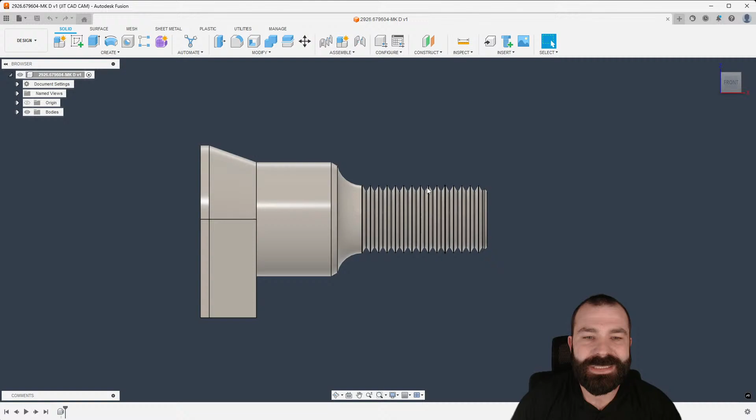So as you guys can see here, this is going to be a mill turn part. So we're going to go ahead and jump over to manufacture. And with that being said, the first thing I need to do is create my setup. Now, I don't know how many times I'm going to have to say this, but I say it a ton and I say it quite often.

Everything you do in Fusion was aimed at kind of like reading a book, right? Now, we're always going to read from the top of the page down, and as I've started to say, every time you see a little line divvying something up, it's almost as if you're reading paragraphs, right? So again, we move top down, left to right. So the first thing I'm going to do is I'm going to create my setup here. Now, again, I asked this question last week, and I'm curious, does it always take a moment for the first time you create a setup to turn on?

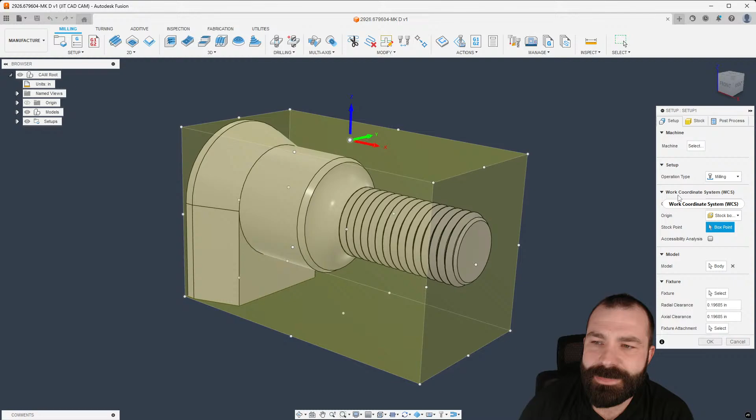But as you can see, everything has come in. We now need to just walk down the page. Again, we're going to read our paragraphs. In this case, this is going on a mill turn, and I don't have a machine definition set up, but we're going to go ahead and swap out to turning. And then from there, you're going to notice it's automatically recognized that this part is round.

Now, me personally, I might start with the Z the other way. I should add into the fact that this customer in particular actually has no sub spindle. So we're not going to do a part transfer here, but they do have a Y-axis and live tooling. So again, we're going to go ahead and move down that paragraph. I've flipped my Z-axis. X in this case doesn't really matter if it's pointing to the right or pointing to the left here. I like to orientate my stuff as in my lathe tooling is going to come back in on X.

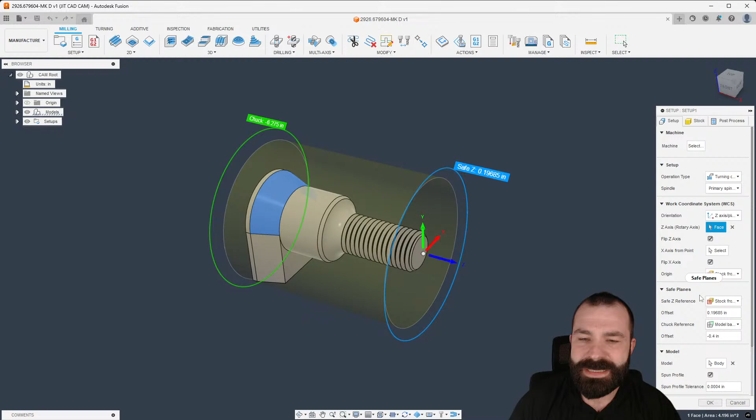But I like to orientate and look at my part with my X pointed away. Again, most tooling is going to come in on that X axis. Now, as we go down to that next paragraph, our safe planes, a lot of times you're not going to change this unless you absolutely need to. Again, we're going to use a reference of a chuck holding the part in the back, a safe plane, which is where all of our rapids go to right off the rip.

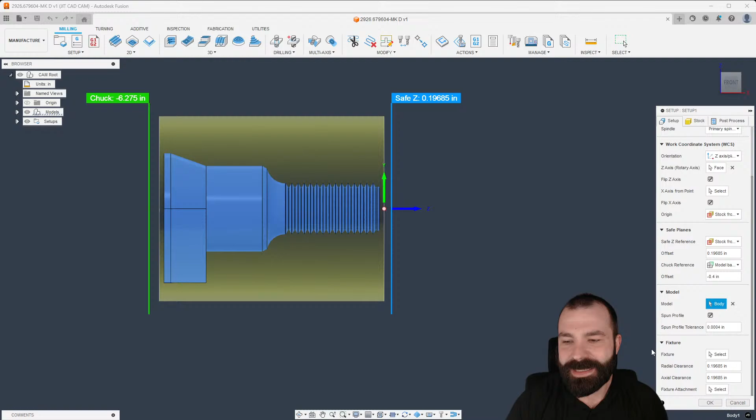So again, we just continue down. Next paragraph, we're going to talk about what you want to manufacture, already selected. Lastly, if we had our fixture or our chuck in here, we could add that in. So let's go ahead and get that page turned. So as you guys can see, Fusion has automatically created my stock. Now, for those of you out there, I can't stress this enough, don't ever use relative, only use fixed size or your solid / preceding.

As you can see nominally, whether or not you believe in the bald eagle increment or that other unit, we're not going to talk about that. You can see it's always a round number, right? You're going to order your stock in a nominal dimension in most cases, and we can go ahead and type that in. Now, I am going to give it just a little extra. Why not? Let's go 6 1/4. And I'm going to show you guys what happens when you intentionally screw something up. But we're going to offset from the front, and then I'm going to go ahead and give it 20 on the front to clean up.

Lastly, for anybody out there, our post-process menu, program name, program number, WCS orient. This is going to be, your 1 is for 54, 2 is 55. If your machine uses something other than that, obviously know that it's just going up in an increment of 1. So we've created our setup. From there, we're going to go ahead and turn the page, right? Fusion, again, is pretty much organized in most toolpaths to run through this stuff right off the rip. If I wanted to face off this part, in this case, I'm not going to because there's no reason to face this tiny little amount.

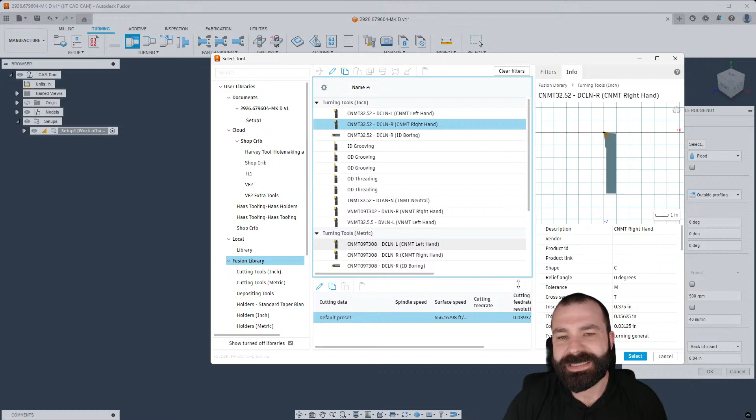So I'm going to jump down straight into roughing. The biggest mistake we always see at JITCADCAM is the fact that people want to go in and change a toolpath, as you guys just saw me do here. By the way, if you guys want t-shirts made up about this, I should make t-shirts. But we can hit OK, and most times the toolpath is actually going to do usually what you want it to do by default, right?

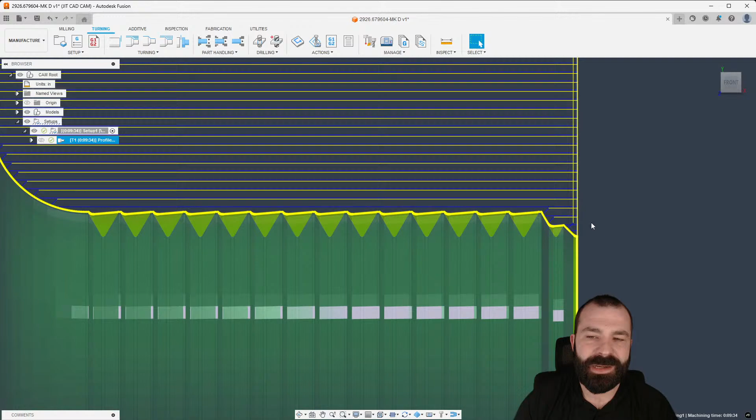So as you all can see, we went ahead and created our toolpath on our part. Now, once we create our toolpath, we can manipulate and change things because visually it's much easier to understand things like, hey, we're undercutting inside of here. I don't want to undercut. I don't want to gouge my part there. I would like to keep that profile as smooth as possible.

And again, we could jump out of this menu, edit what we were doing, and because we're changing the blue lines, as you guys may or may not know, we could go ahead and turn off that grooving. And just like that, we're now coming across that profile and continuing all the way down and around. So because of the way Fusion works, and in Steve's case, FeatureCAM does very similar things, this blue boundary right now is the spun profile. The yellow is the stock still left to machine.

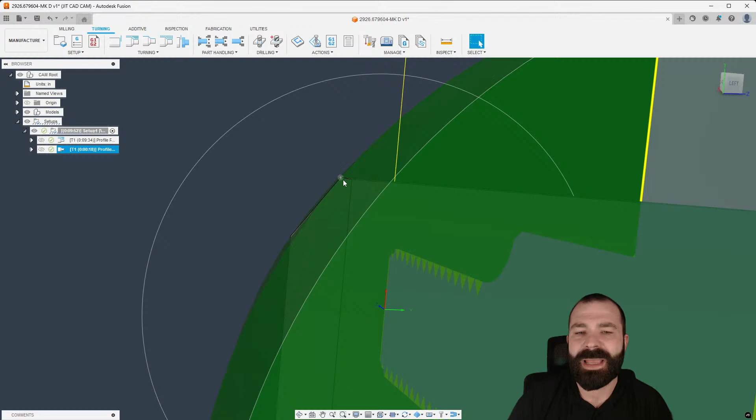So as you can see, we could quickly just derive another toolpath off. In this case, we're going to hit this now with a finishing profile. And again, we're just up and around our part following that same contour. Now, some of you may be curious, why are we not machining all the way up here at the flat? The reason is because that is still not considered inside of our stock. It's right at our stock.

If we were to change our stock size, again, we go in here. Let's say we're actually getting some 5 1/4 round material. And now we're going to go ahead and regenerate our toolpaths. And from that, we should now see, one, me in the wrong orientation. And with that, we're now going up and around and over the top of our part with both of those profile turning situations.

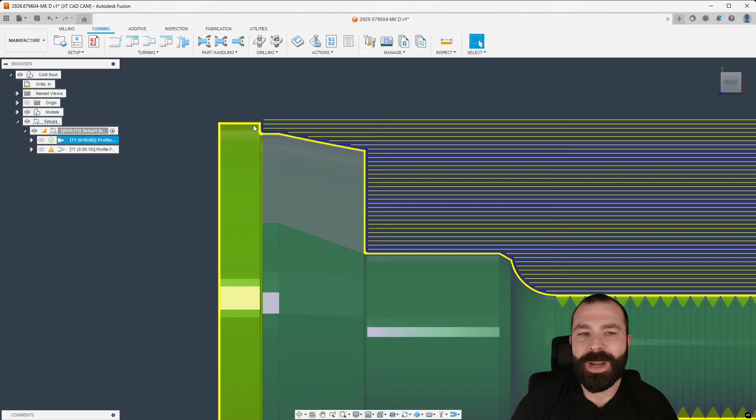Now, some of you are also probably wondering, hey there, Fusion Phil, we never touched the front of this part. Well, this is the fun of having control once you get a toolpath on your part. I can visually see the blue line stop at the front of my model. So if I go to my geometry, the front of my model is basically where we start from. I know I said stop, I should have said started from model front. But if we do something simple like, say, stock front, you're going to notice it's now bumped out that yellow line, which signifies our profile. And now we are basically facing and OD turning all in one shot.

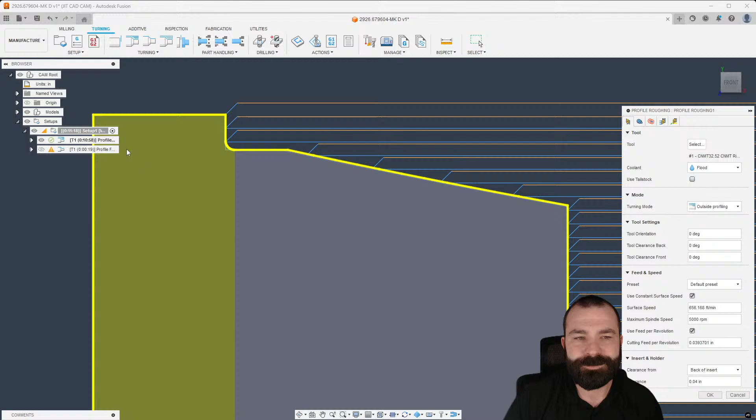We did get an error here, for anybody that has seen me do a demo of our software in any way. Our lead out is being changed because if it wasn't, it would be gouging our part or slamming into this back wall. This is a yellow line, which means linking and is a rapid. We didn't want that to happen. We may need to extend again in our Z axis with how far back we're turning our part. So again, as you can see, Fusion is very quick to update based on those changes.

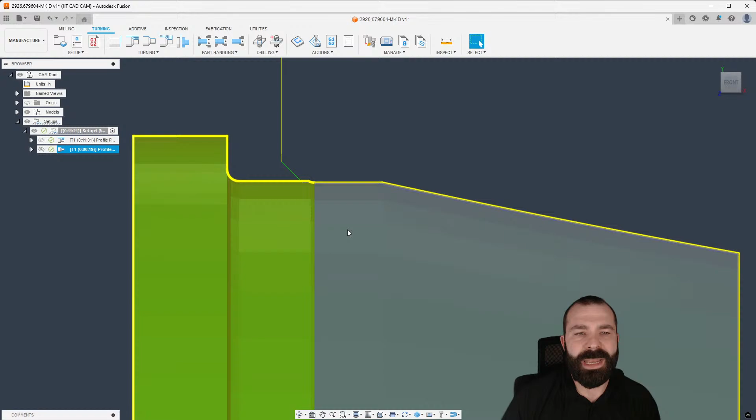Now, we may want a lead out as well here. So again, we go to the lead out linking tab, and I'm going to say allow lead to cut stock. And now you can see we could do a little dog leg move out and get away from our part.

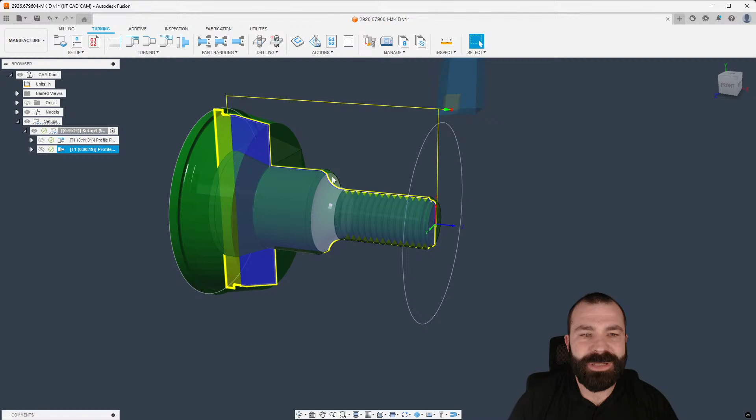But as you guys can see, let's go ahead and change up real quick. Let's add some milling in. And we're going to go ahead and switch back to the milling tab. Now, there's a lot of ways to mill out these features. As you can see, we have some 3D areas here that may need to be taken care of. So what I'm going to do is I'm going to go straight for adaptive clearing.

And in this case, he is a lucky individual because he does have a more sturdy, heavy-duty built machine. It is a DN Solutions machine. So we might be able to get away with a 1/2-inch end mill on a live tool lathe. Now, this is what I'm liking at the end of the day with Fusion, is because I have that ability to see a tool versus my part.

As you can see, this is a massive part, and it's 4140 as I'm being told. And this tool may not suffice for that. So again, depending on what you're doing or how you're trying to do this, this may or may not be the best solution for the system, but it still goes back to that same thing. As you can see, by nothing more than hitting OK on this toolpath, I am still coming in on the Z axis and wrapping around and roughing out that profile.

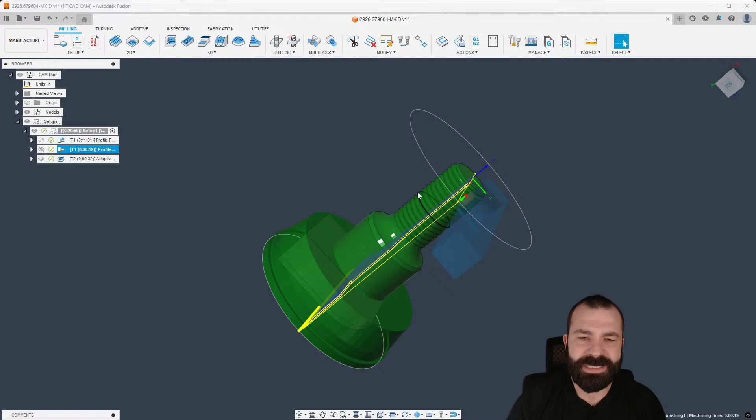So again, this is the great thing about how Fusion works. You guys are seeing here in real time when I turn my profile, we're already getting everything inside of here, and our rest machining for our milling strategy is automatically detecting where it should and should not go for cleaning that area up.

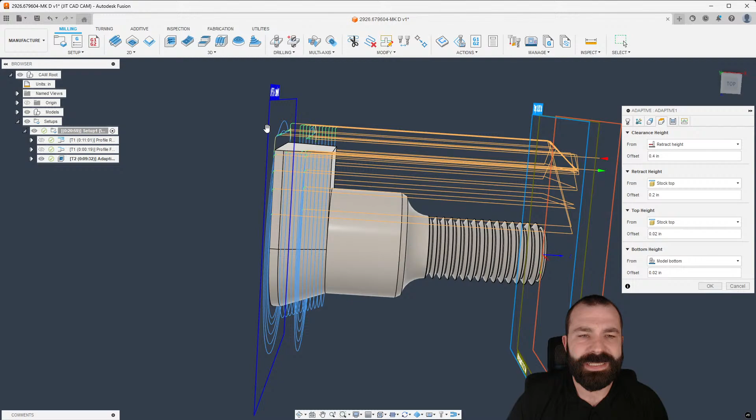So again, if we want to go ahead and pivot from there and start to do something that is going to involve 3Ding the surface, or maybe I want to change the heights tab of this toolpath, as you're going to see, I'm going to drag that down a little bit. Now, you could type in an offset as well, just for those of you that are newer to Fusion. But the idea is still the same, right? Get the blue lines on your part and then make those changes. And the reason why I'm relieving that a little further is so that we have room for a ball end mill to possibly blend this surface.

So again, we could go back to our 3D contour in this case. And we're going to go ahead and pick a tool. Now, you could stay with the flat end mill. As you get more advanced in Fusion, you'll realize a lot of times I do swap my tool out on the fly. And for the sake of Steve, because Steve is brand new to Fusion, as you can see, you could have multiple different speeds and feeds tied to a tool.

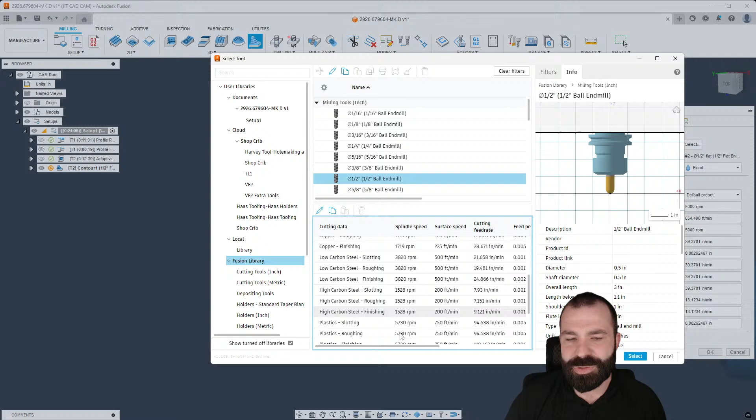And just like the kind of feel of FeatureCAM, you could easily go down and pick whatever it is that you're doing. And then your step over and step down can automatically pull from that tool. Now, I've seen some things coming up that are going to change a little bit of how that material library works, and it will start to feel a lot more like FeatureCAM. So again, we picked the tool. As we always know, let's go ahead and hit OK and see what we're getting.

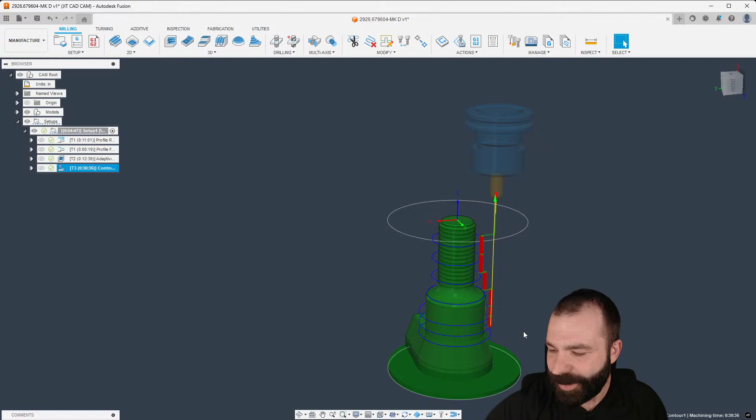Now, as you guys can see, we're only going so far down this part. And this is where I like to test you veterans out there. Does anybody know why we are only going down so far on our part? We're not going all the way down to where that chamfer is. And I will give you guys a few moments to answer. Now, if you can't guess it in the next couple of minutes, that's understandable. I'll show you why and how this is working.

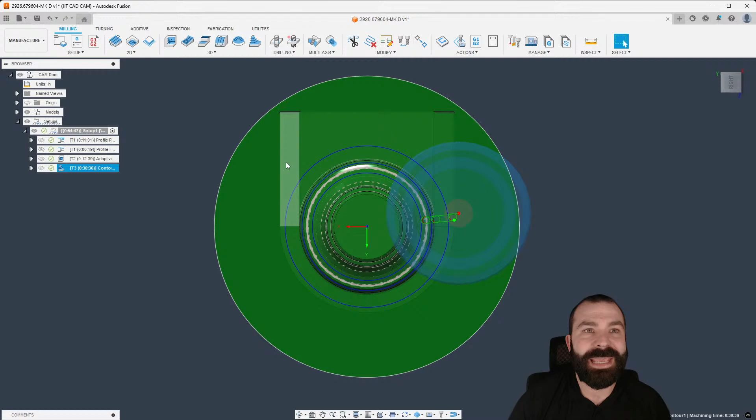As I tell people, you get the blue lines and then you determine what's wrong with the blue lines. Well, in this case, we'll go ahead and visit that here in a second, Elijah.

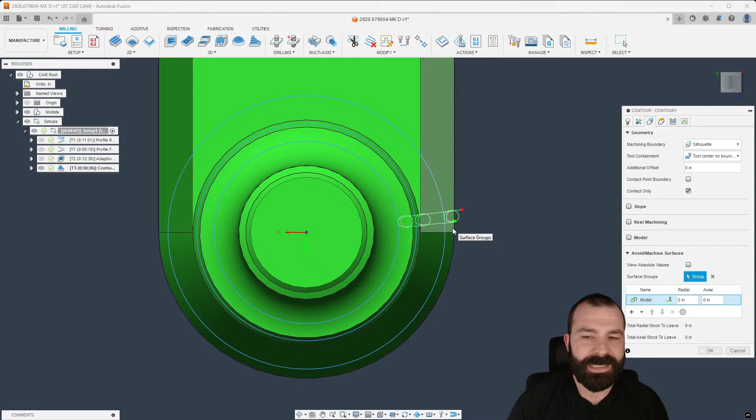What I'm going to do is edit that toolpath. Because we're looking in an XY plane, the reason we can't get outside of there is because we're basing the containment on tool center and a silhouette of the part. As you can see, this blue line is almost to the point where it is the center line of my tool, but it will not go outside of the profile of this part. So there are ways to remedy this. We could say tool outside of boundary, or we could even turn on contact point boundary, which should help remedy this situation.

As you can see now, we are going deep enough in Z and 3D'ing everything out as well. We can simply go in and change our step downs. I'm going to pivot here once we get the step down changed, and I'm going to limit where we're going by using rest machining again, so that we can limit where the toolpath actually hits our part. Again, it's all now down at the bottom area. From that, we can switch gears into turning those threads.

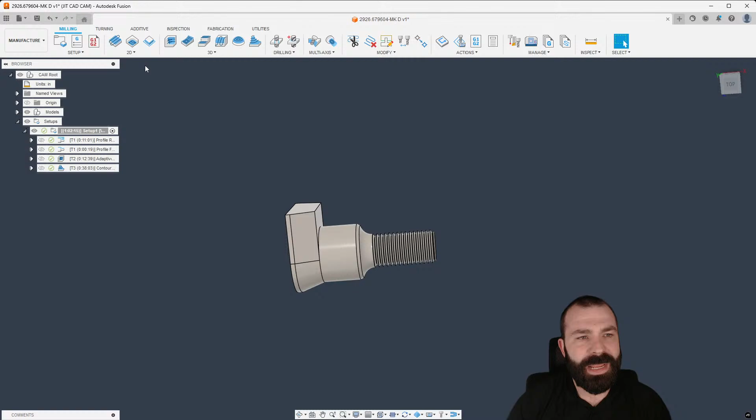So in this case, I'm going to go ahead and go to turning. We're going to go down and pick thread. And from thread, there's Steve.

Steve's throwing 10 in the chat already, guys. There he is, he did it. That's the beer, right? Here you go, Steve. This one's for Steve, boys.

Yes, I know it's NA. I'm not going to drink a real beer on here because I'd get sloppy quick, I think.

But as you can see, we went ahead to go threading. I'm going to pick my threading tool. Again, you guys are going to define this stuff over time. Where's my OD threading?

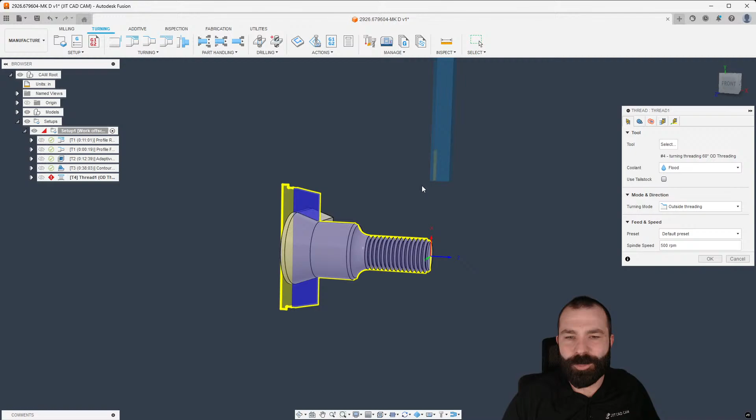And from that, what you're going to see is based on our geometry, we need to define a face. So if I take my own rules to heart, had I hit OK, I would get this lovely error message, which would pivot me over to the thread face that I need to select.

Now, the bad news here is that the top of every one of these is a face to thread. Usually we don't like modeled threads inside the software. However, thinking about how we can filter this out, I can jump over and change where we start from on the front and even how far we go back. So I'm going to do selection here. As you can see, by selecting that second edge, we're now threading the length of the part.

And with that, we're going to pivot over to the passes tab. Now, this is where I think a lot of people get confused inside of the software. I myself feel like no matter what I do for the dimension here, I always have the same problem.

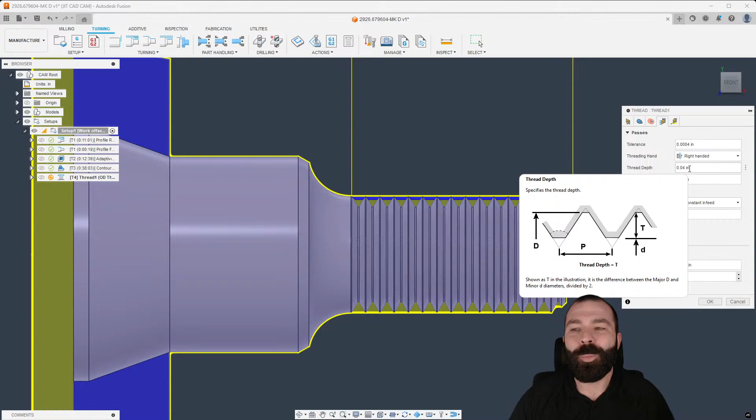But in the world of turning, thread depth is radial. And in the world of thread milling, thread depth or diameter offset is diameter based. So we need the difference between the major diameter and the minor diameter, which, as Steve said, is 1375 and 115. So we need to take those two numbers. I'm making an educated guess here, that looks like 260 divided by 2 would be 130, right?

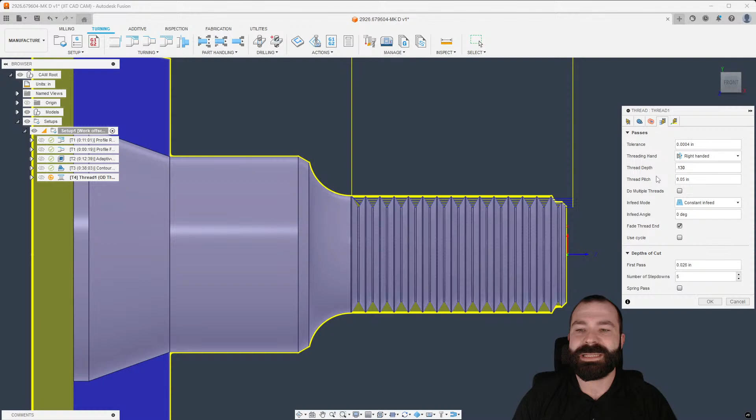So my thread depth is 0.130. And again, remember, we're basing this off half of whatever that difference is between the two diameters. Or if you're looking at the Machinery's Handbook, you'll get the radii by default in your thread height. But as you can see, the blue line actually lines up pretty good to the bottom surface. And from that, we have our threading cycle.

Now, we do need to still adjust our pitch. Where was it? 6 threads per inch. So we could do the good old-fashioned 1 divided by 6, being able to type in these menus to give us our feed. And from there, number of step downs, of course. As you can imagine, you probably want to make this in a couple of step downs. This is a pretty good size part.

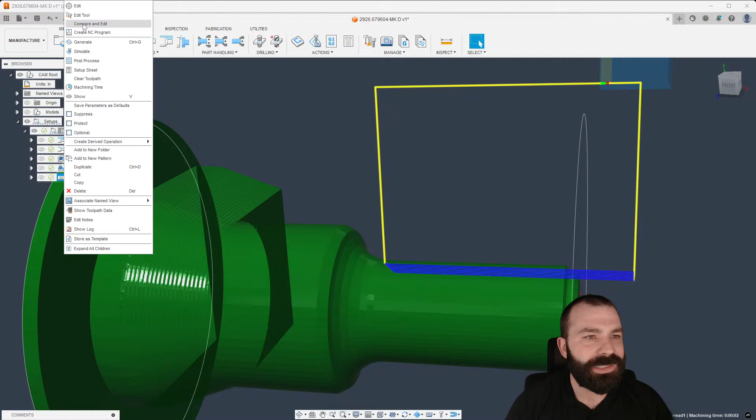But as you are looking, if I get my model out of the way, and we're going to turn off the good old-fashioned spun profile, in this case, we're actually slamming that tool in the part. I thought it would physically give us, oh, it should give us the threads, but that is a tiny tool. So we're going to go ahead and update a few things here real quick.

Thickness, no we don't need thickness. We need overall width there. And then we need to change our thread pitch, of course, so again 1 divided by 6 in this case. That should make the thread much larger, but of course it's not wide enough.

And there we go, we have a much larger turning tool in place, and we can regenerate our cycle. So with that, as you guys notice, we don't have it simulated here. Let's go ahead and run the simulation on this to see what's going to happen.

So now this will be the biggest difference for Steve at the end of the day, is that the simulation inside of Fusion does not have currently mill turn machine sim. But as you can see, walking through all of this stuff, we can continue.

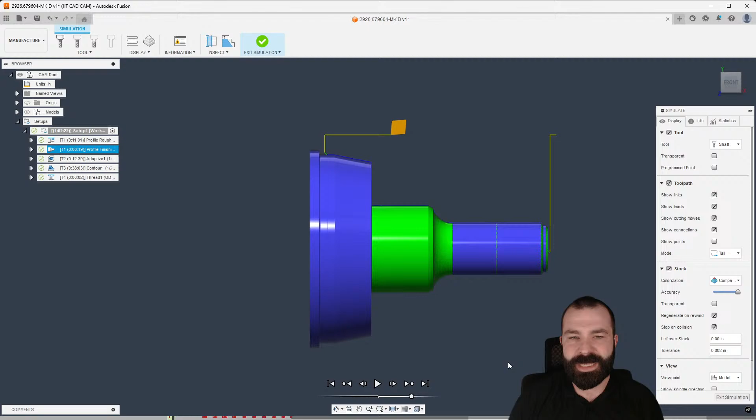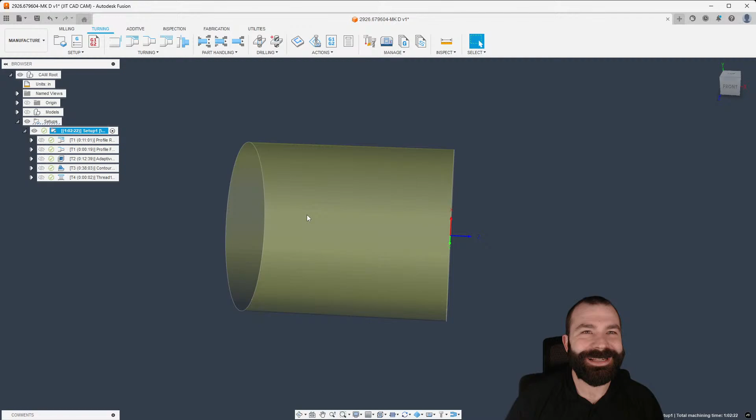Let's just go ahead and say overall length is 6 inches, and we are going to use 5.5 inches worth of stick out, right? Why not at this point? That should get that job done, and then we're going to edit this tool as well.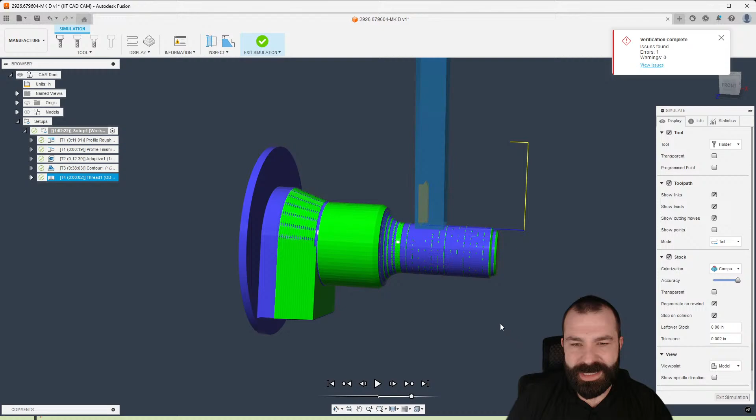So again, we have everything set up here. Let's go ahead, I'm going to simulate just the threads. And it looks like we should get a solid model that shows threads.

3 a.m. in Australia, bit of a struggle. Matt, what's going on, buddy?

So again, let's go ahead and change a few things here. I want to get that model turned off. And we can let this run through.

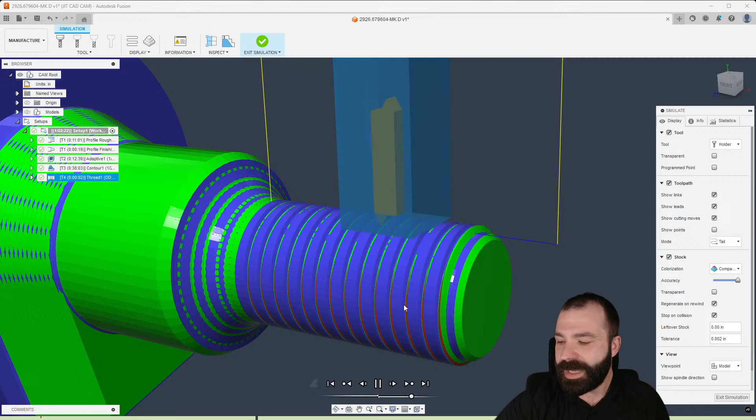And again, we're going to get some red here. For those of you that don't know, that red coloring is normally you hitting the part. But because of the way these threads were modeled, they were just as rings, as if this is either something for plastic injection molding, or you have that silicone tube that's going to slip on there.

So I'm going to give this a second. I do have my accuracy turned way up. As you guys can see, it's slowly coming through. Maybe I'll turn my accuracy down, or we will crash Fusion.

There we go, went ahead and paused it. Again, as you guys can see, we have our threading cycle coming through that part. And with that, the last thing to do, I'll leave it to you guys while I go back and read up on Elijah's information here.

Need to thread mill a 632 in stainless this week. That's going to be a good one. So I bought every thread mill, but this one would be the first time using them. What's the recipe? Here's the link. Awesome.

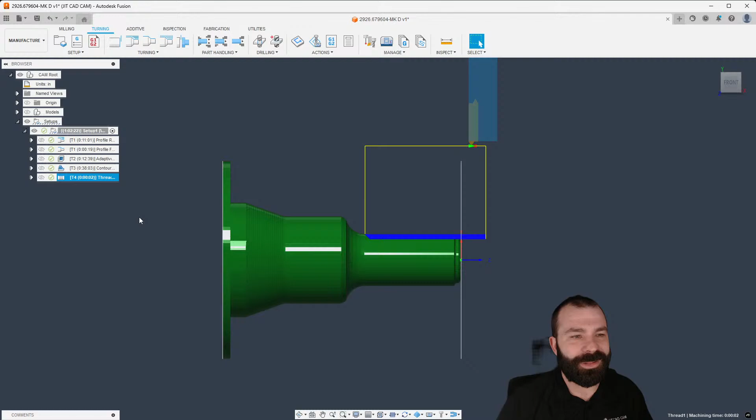Elijah, we're going to look at thread milling. We might as well, we're doing turning here on the lathe. And the last thing we want to do, I don't see anything in chat, but we're going to go ahead and turning part, this is where we're going to part off our model.

Again, we go to our library, pick your OD grooving or OD threading tool. And we need to turn that model back on, of course, so we can see what we're doing. And now this is where I would tell you guys the importance of your stock and the size of your stock.

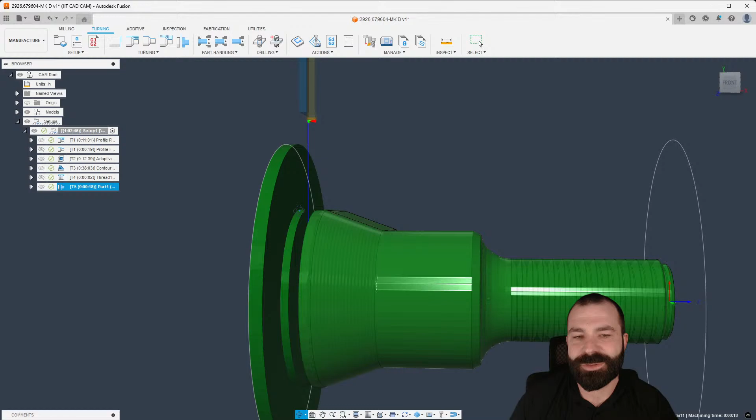So visually right now, you guys can see, in this case, I'm not going to hit that stock, but if I was to have to do something like flip this part over, Fusion is still going to recognize this stock right here as being in the way or a problem.

My dog is trying to come into my office right now, and she just barged her way in. There we go. But other than that, Steve, I hope this helps you out.

Let's go ahead and pivot real quick to a little bit of thread milling with Elijah and get another file opened up. I'm trying to think what I have for thread milling. Actually, you know, we could thread mill this on the Z, could we not? Let's go ahead and go for it. Be a quick second, make sure nobody's got anything in the support channel here.

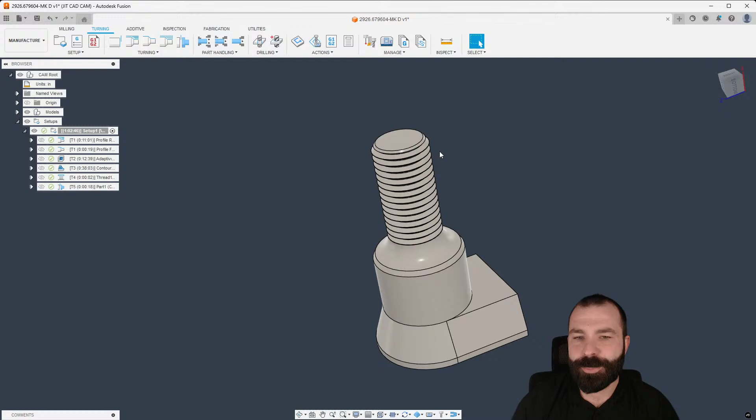Nope, all right. So if I was to shift gears, if you guys wanted to thread mill a feature like this, we would go back to milling, 2D thread. Now it doesn't matter outside or inside. Again, the surface you're going to click to drive that will accordingly be either outside or inside. But the same rules kind of apply, right?

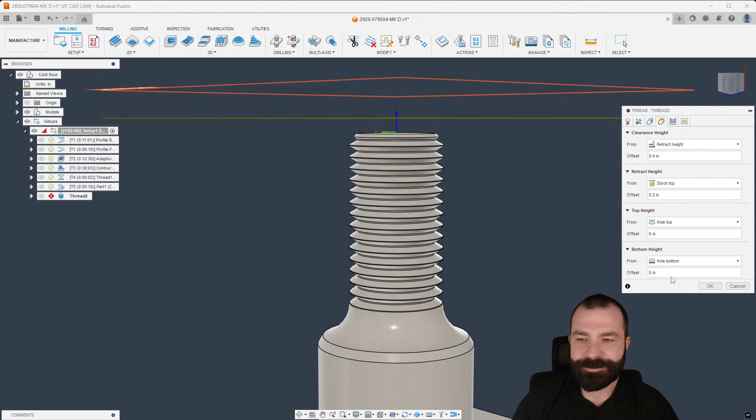In this case, it's going to be driven by hole top to hole bottom. I would possibly want to go model top here. And I would either go model top minus a distance, or if I can select a specific depth to go to, that works much better for me. And then in our passes tab, this is one you have your thread pitch. Again, that's going to be our 1 divided by 6.

And then a little further down, we have what's called our pitch diameter. Going to click it. And now, remember, this is the part that everybody confuses - we need to type in diameter, right? So as we talked about, that 260 difference, this is where I would plug that in.

Now here we go. We're going to go ahead - I know, you internal thread, I figured as much, system is still the same, Elijah. So you'll have your minor diameter - that's the surface you'll use to drive it. And then from driving it, that offset will go the opposite direction.

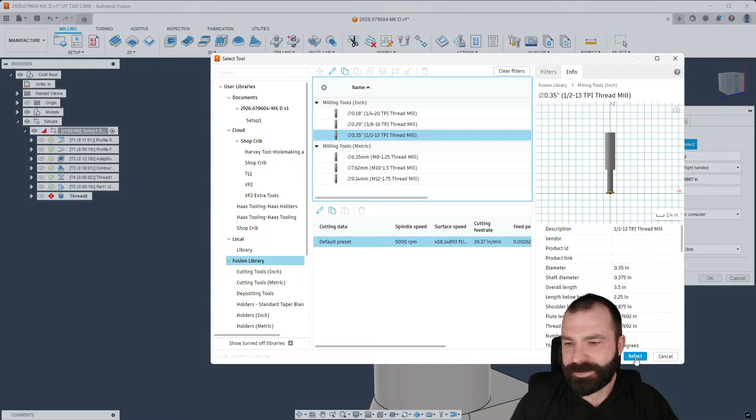So I don't think I have a thread mill in here. Oh yeah, we do. Now we're going to have to edit it, of course, but we can get it selected to start with. And then as you guys can see, there is the threading cycle helixing down the part based on that actual dimension. And if I was to edit this tool, again, we go ahead and get our cutter here.

And thread pitch, 1 divided by 6. And then our flute length also needs to be a minimum of 1 divided by 6. Now, depending on your thread mill at the end of the day, you may have more than one row of teeth, right? So as you see me try to increase the number of teeth, my flute length, of course, is errored out. So let's go ahead and give that a much larger number.

And as you can see, terrible, terrible example - we're going to make some changes here for you guys. But you can see that it's stacking those 4 threads for the thread mill. I would need to actually update my shaft diameter as well as my actual tool diameter in this case. So again, we can bump that number up.

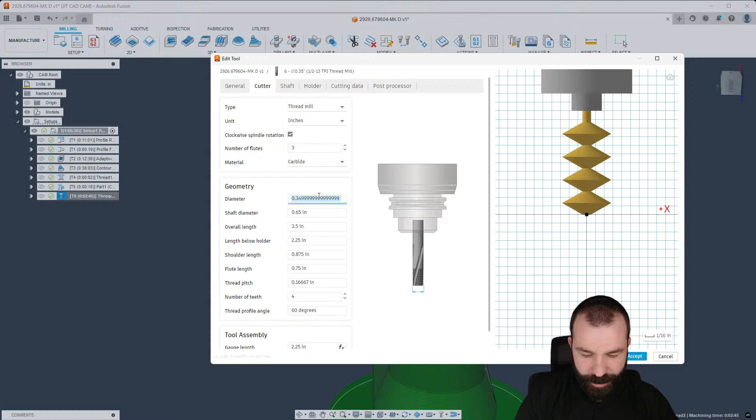Let's say we're going to go like 650. And then we will go 650 on the top. So as you're seeing, that thread mill looks much better now that I've edited it out. But that is 4 threads or 4 actual leads to be able to mill with.

So Elijah, does that work for you? Go ahead and let me know in chat. Steve, I hope you're still there. Either that or Steve's already downloaded and installed Fusion and he's getting going.

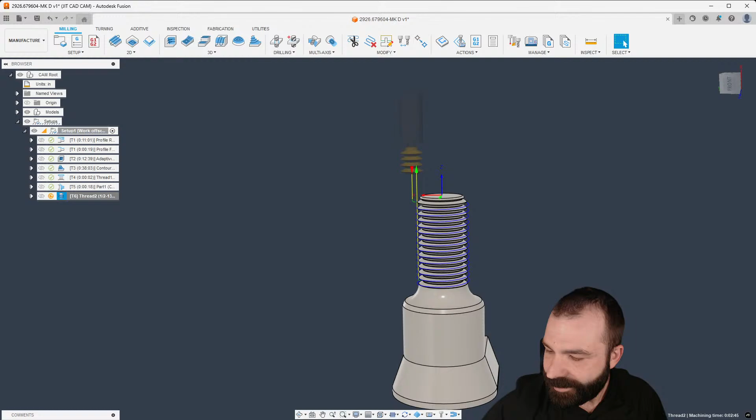Blake, I see you out there. Bought another beer. Blake, we appreciate it quite a bit. Thank you, sir.

But with that, we can go ahead. You need the crest - what do you mean by crest? Go ahead and let me know. I'll give you a sec there to throw that in chat.

And I do have one more thing we're going to do. Somebody was bugging me a little bit about this. We've visited this - I feel like we visit this once a month, right? So if I had a part, I'm going to start drawing this here real quick while Elijah gets some information in chat. Let's say it's 1x3, and there just so happens to be a 45-degree angle here.

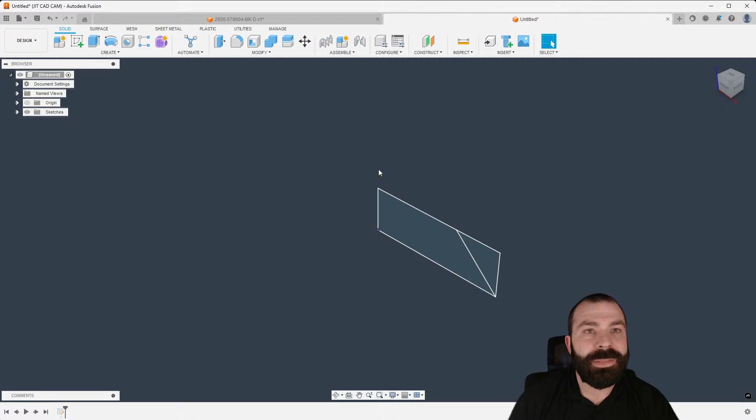So, okay, the edge of the single point, it doesn't come to a sharp point. Yep. So based on the information, of course, when you measure the diameter of the tool, you will in most cases have to compensate in one way or another. As you can see here inside of Fusion, I have the ability to put on wear. Again, when you're thread milling, you could use the wear setting at the controller to adjust it to get it to where it is. I will tell you, in all of my time, the best way I have found to do thread milling is to put it in there, use everything as it should be, right?

So again, that 260, all of that information is coming from the thread spec call out. Now you run it and you go to put your no-go gauge in there and you're like, oh, you know what? It's still a little tight. Well, you start adjusting wear. Let's say we adjust wear by 15, 20 thou. That's where I like to come back in the software and adjust my pitch diameter and then re-zero out my wear. Because if I had to do 100 of these, I don't want to just keep loading up that wear setting. I'm going to do that right here inside of Fusion.

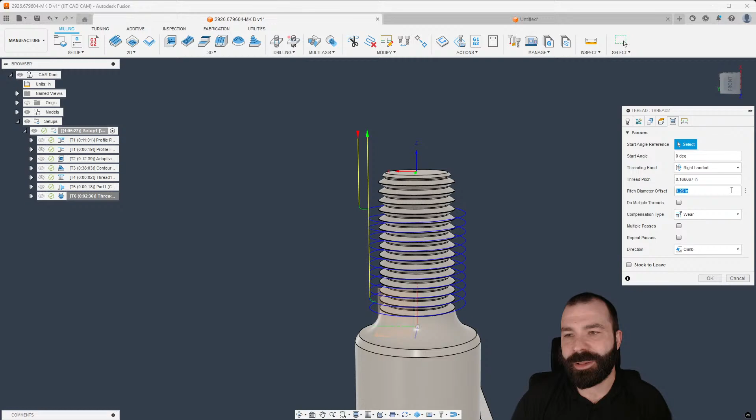I will also tell you in most cases when you guys are doing this, set your pitch diameter offset to the maximum tolerance allowed. In this case, you always have a major and a minor. Well, you want to do the distance from the max major and the lowest minor, right? That helps you almost get perfect threads every single time. As for the sharp point, that won't make a difference, Elijah. Like I said, the diameter they give you based on that tool and the way Fusion is calculating this information, you're always going to have to compensate somewhere to make up for it.

So with that tool not having a sharp tip, as you can see in my cutter information, you have a thread profile, but it's angular. There's not a thread tip radius as well. So that's why when you calculate that, it's center line G code, and then you need to define your diameter of your cutter right here inside of Fusion. How many passes for stainless? That's a good question. I would have to look up that specific tool and see what they call out for a step over or like an AE radial engagement, right?

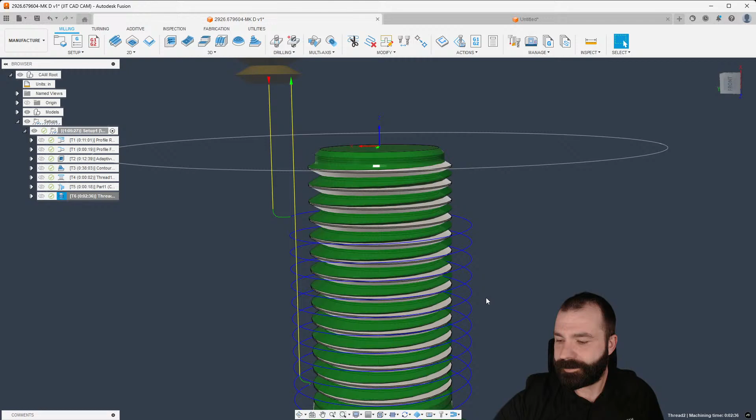Cool. Questions? More questions? Any questions? I see 16 of you guys out there currently hanging out. 3-4. What is 3-4? I don't know what username 3-4 is.

Oh, you're calling out 3 to 4 passes. I like that. In the case of this part, this is a massive part, so it may be more than that. Again, for something smaller like he was doing, I think he said he was doing something 6-32, 4 to 5 passes sounds about right.

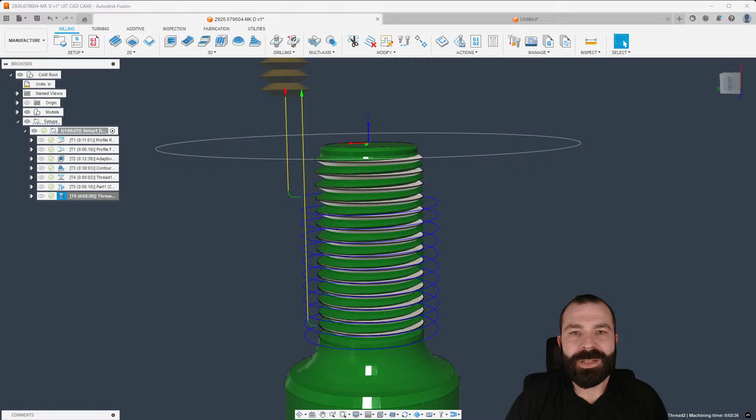Cool. Let's jump back to this other part where you guys always love to watch me doodle. So the question I had received is in the event I have a part, and we go ahead and say manufacture, so reduces passes. Are you saying when you start to mill out with multiple passes? As you guys may or may not know, you could do multiple passes here, and then you could adjust the step over. Now, something I think a lot of people never realized inside of Fusion is, and I can't ever remember the technical name, your step over will actually change as the diameter gets smaller, especially working internally. You see this when you do adaptive clearing, because when you're in a smaller diameter, you're going to overload the tool. And we'll take a look at that.

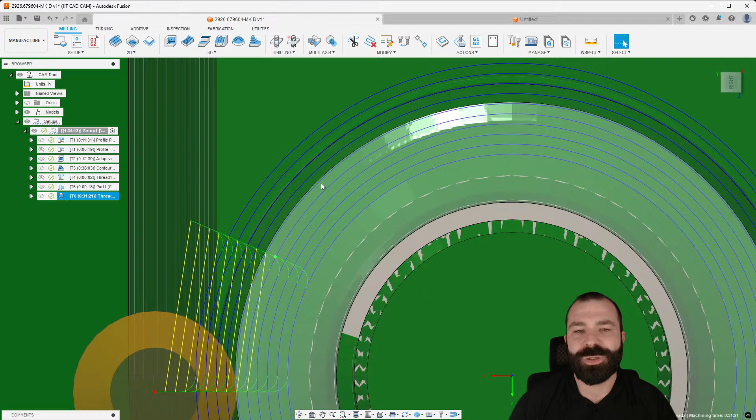Let me see if my adaptive clearing has the information here. We'll have to mill a pocket here in a little bit. We'll prep for it. We're going to put a circle on here. There we go. We could do a little milling on the top of this part. But the issue that I started to see as people are starting to talk about with this face right here is using a chamfer tool and making multiple step downs to create that angle, right? Now, as you guys know, it seems like every time I go to do this stuff, I can never remember what it is. But we're going to go ahead and fixed size box this up.

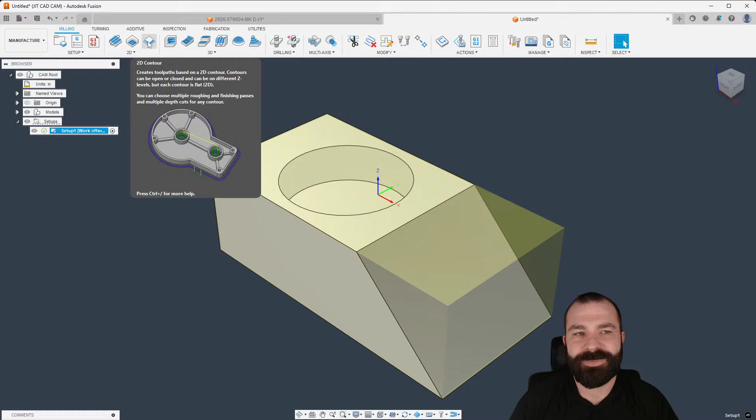And with that, there's a lot of options to try to achieve this. Now, some of you know in 2D Contour, you have the ability to do multiple depths. And then with multiple depths, we can do that with a tapered wall angle, right? So as you guys can see, if I wanted to do a taper of 45, that is also my chamfer. And I'm going to go ahead and grab a tool to try to attempt this.

This is where, like I said, I always mix this up, right? So if I go in and I try to do this with a spot drill, if I could find a spot drill in hole making, and let's get the big one out. What you're going to notice is in the passes tab, it does allow 45 and it does allow maximum step downs to be set. But when I hit enter, of course, I forgot to grab an edge. So let's go ahead and grab that edge real quick.

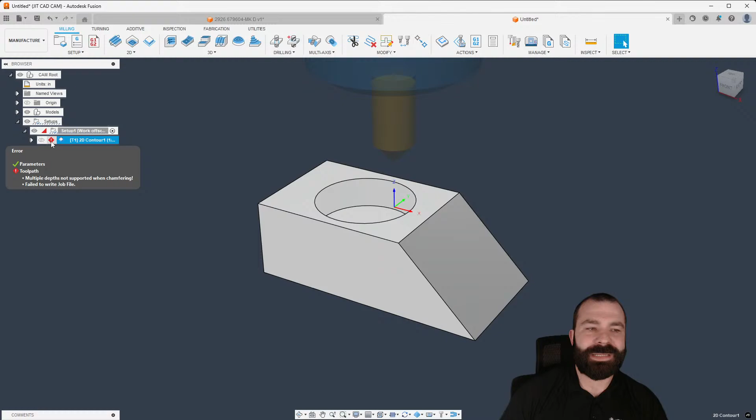And we're going to get an error that says multiple depths not supported. So how do we remedy that? What we could do is go back and try a different tool. Now, again, I was asked about using an engraving tool, right? So if we say hole making and we try to find it, obviously I can't find it because that's a milling tool, an engrave / chamfer mill, right? So we're going to grab a different tool here. We're going to hit OK.

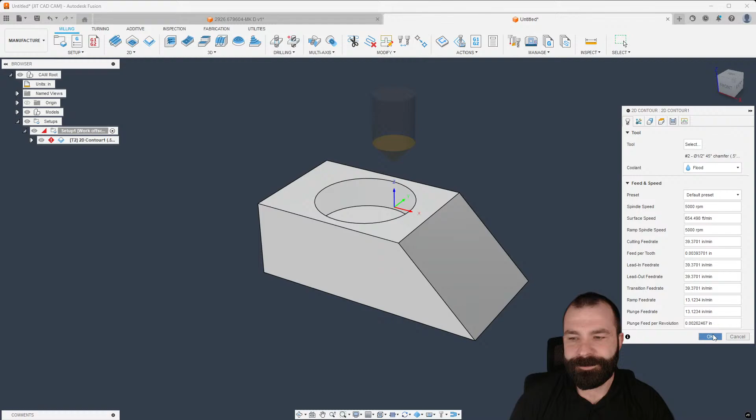And as you're going to notice, it's not doing the multiple step downs now, right? So if we go back and take a look in our passes tab, multiple step downs has actually completely removed itself because this is a chamfer and/or engraving tool. So even if we turn off chamfer, we still don't get multiple step downs. So what do we do? We have to find another tool.

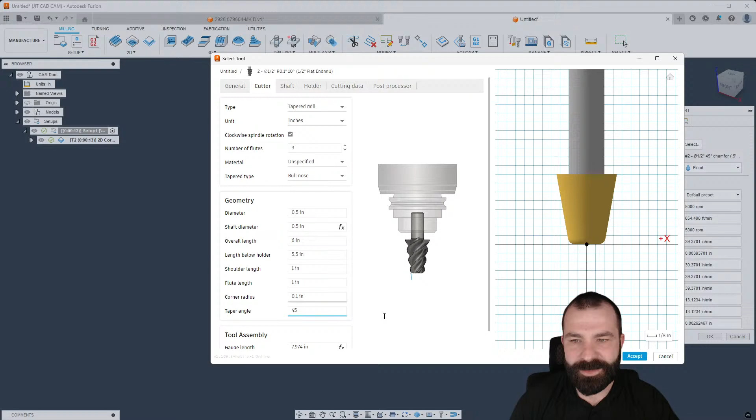Now, if we go in and we build a tool, and that's what I'm going to do for this. Actually, we're going to go ahead and copy that flat end mill over, and let's put that on the untitled. So if I edit this tool, I'm going to go to my cutter, and then this is going to be a tapered mill. So this is where things get a little screwy for some people, because here I can set an angle, and you could actually set an angle of 45. And as you can see, we now have a 45-degree angle for milling and chamfering.

Now you could still adjust things like your radius in the corner. Those things are all still editable. Maybe you have a 0 here because, again, you're kind of lying to Fusion at the end of the day about getting that information set correctly. So we can go 0 here, I believe. That's right, you can never go 0. And usually your spot drill or whatever you're using is never actually 0 either. Going 0.035, as you can see, also reduces it.

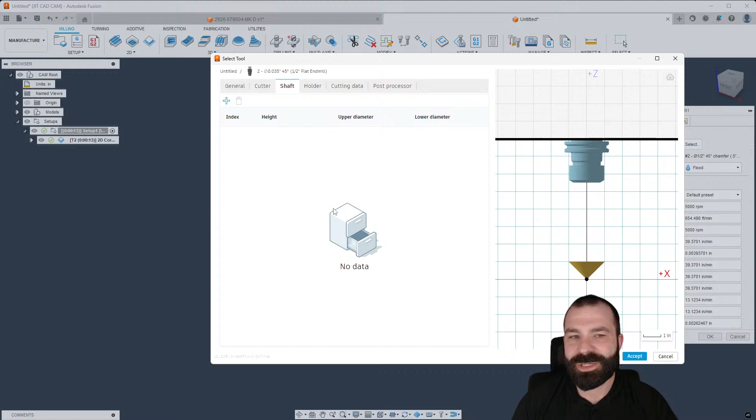Understandable in this case, guys, that the shank or the holder in this one would be off, but we could always edit and change that as well, adding a holder or adding a shaft to fit that all. The idea is still the same: what we're really trying to make happen is that ability to do a 45-degree step down following that angle and utilizing the center line of the tool, right? So in this case, I said 0.035 is the diameter, divide by 2 puts me on center here. And now we're stepping down that surface based on what we put.

Stuart, great to have you out there. I see you out there, buddy.

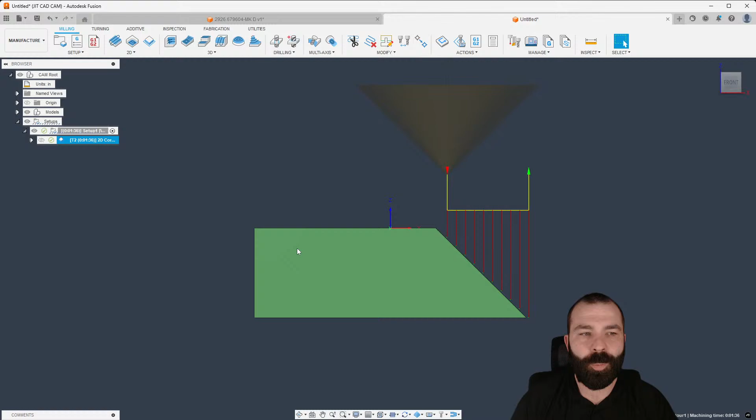So again, I did that with a tapered end mill. I set it to 45 and we stepped down that wall. Another one we could have used in this case, some of you may have a shell mill as well. And that shell mill is another tool that will actually follow that 45-degree chamfer. Now I can set an angle on that shell mill. Again, as you're seeing, it's 45-degree step downs using 2D contour.

And with that ability, we can edit that tool. Again, we go into our tool, we have our cutter. As you can see, we have a taper angle of whatever that is going to be. Again, we can set it to 45. And once we regenerate, it of course will align itself.

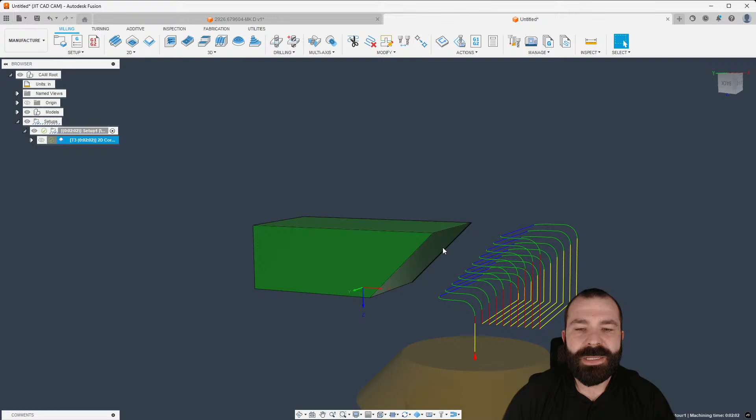Under chamfering with a dovetail or a double angle. Yeah, we could look at chamfering underneath the part, right? So if we needed to cut underneath this face with a different Z, I'm going to create a new setup, of course, because we need our Z axis pointed the other way. And now, if I was to use 2D contour, I can set my 2D contour based on the bottom edge of what I want. And in this case, I'm holding my Alt key here.

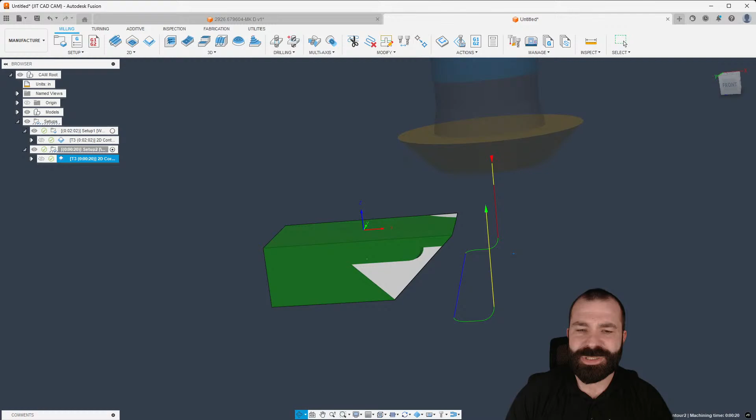Now, I do need to be cautious of starting off the part far enough that we don't actually plunge underneath. So I can edit that tool path. I'm just going to put an inch in here. And then from that, we could go ahead and hit OK. Always get the tool path on your part. And as some of you are starting to realize, you have that edge selected.

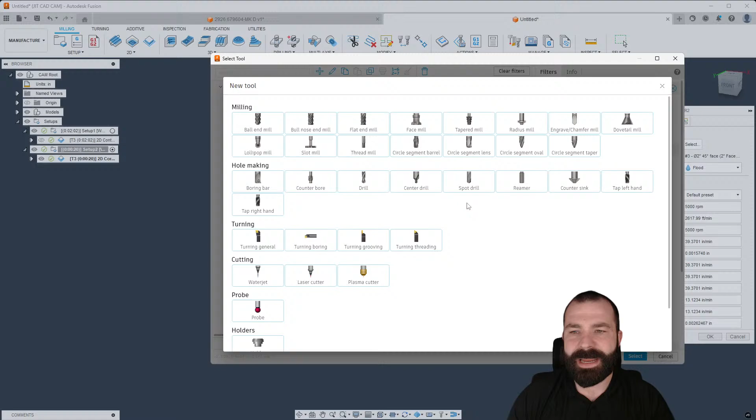All right, so at this point, undercutting that dovetail, right? What I've defined so far before I was rudely interrupted, I extended that contour. I made sure I selected it in the right location. And now at this point, I'm going to go ahead and swap out my tool to a dovetail cutter, right? So again, I'm going to add in my tool. We have a dovetail mill here. By default, of course, you have all of your information as any other time. I'm going to go ahead and plug that in as 45.

Of course, I get the warning, taper angle is too large for the diameter and the flute length. So let's work our way up, right? Let's go ahead and make a flute length of 1 inch, shoulder length 1 inch. And from there, the taper angle for the diameter. All right, let's go ahead and step the diameter up. And we're going to go ahead and step that up. And it looks like we are still having issues with flute length. So let's go ahead and plug that in a little bit more here.

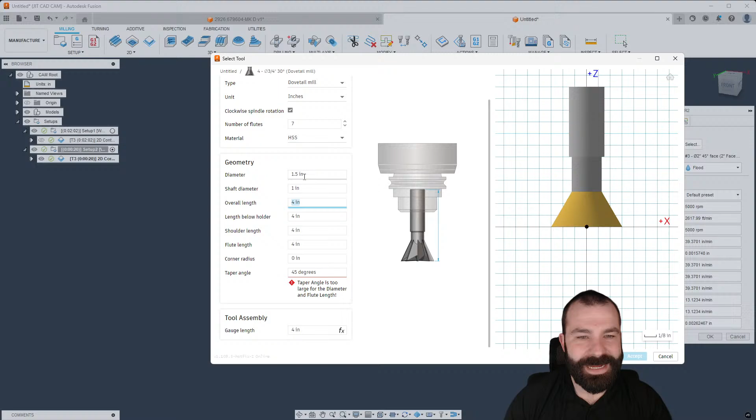So again, let's go ahead and keep working through this for the flute length. All right, so let's just make the flute length even larger, right? We'll get it at some point. Too large for the diameter still. I tell you what, we're just gonna cancel this. We're gonna do what old Fusion Phil says you should do. We're gonna go back. We're just gonna grab a dovetail, and we're not gonna mess with it because I'm probably gonna have to go in and change something anyways.

But as you guys can see, the idea is still the same, right? We're going in, we're machining under that undercut. Now my dovetail is way too small. This is a massive part, but this is how you would still set that to get it down for whatever you're machining. Now, based on that information, when you go to multiple depths here, you do have the 45 degrees, but if you try to type in a negative 45 degrees, it will alarm out. So you can't actually go negative to step down underneath something. So it's almost a one and done type of scenario.

Awesome. Any other questions out there from anybody? Any other curiosities? I did see another question come in from Steve. Steve, if you're still out there, it will pick your thread tool and give you a program. Yeah, 100%.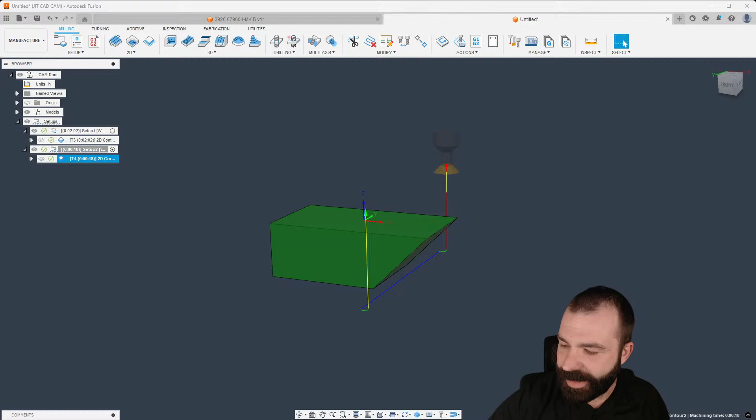We'll go ahead and give it a minute for you guys to respond in chat. I don't know what is going on with this thing. Are you guys getting buffering anywhere on your end? It's telling me over here that it's buffering a bunch. That's why I'm asking you guys. Trying to get my stuff pulled up on my other screen.

Can we show how to set up tool change position? Oh, there we go. All right, we're back on my other TV so I can see what you guys got going on. All right, that was for the thread mill guy, 100%. You can hear me, great.

Can you please show how to set up a tool change position to view it in machine simulation, Haas and Hurco post? So your tool change position by default in those post processors is actually your home position, right?

So as you can see here, oh, I'm buffering now. And now I'm back. Let me turn that TV off so it stops hogging internet signal. Looks like the warning went away. Am I there or am I not? Guys, let me know. I'm having a bad time. Going once, going twice. Is this going to be 2 weeks in a row that we failed?

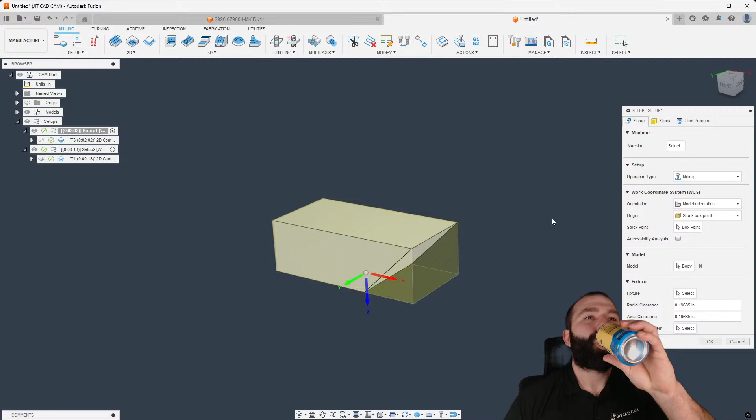All right. Back to Pavel's question. Pavel wanted to know about tool change positions inside of Fusion. Now, by default, if I go ahead and add in a machine here, which I did select this machine, let's go ahead and re-download this and, of course, drop the internet everywhere in my house again. There we go. So your default tool change position until they update things is actually based on the home position of the actual machine.

So again, yeah, Ty, in this case, this mesh network is an old Google mesh. It's about 2 years old. And like I said, I don't think it's the DHCP settings for sure. It's that node is dying. It's been doing it forever.

But again, let's go ahead and try this one more time. Maybe I got to grab a different machine. Why are you not bringing this in? Did we discover a bug? We're pretty legendary for that around here. You know what? Since she's going to be difficult this week, it looks like. Actually, I'm trying to think what machine I have that would have it already on it without having to grab the latest and greatest.

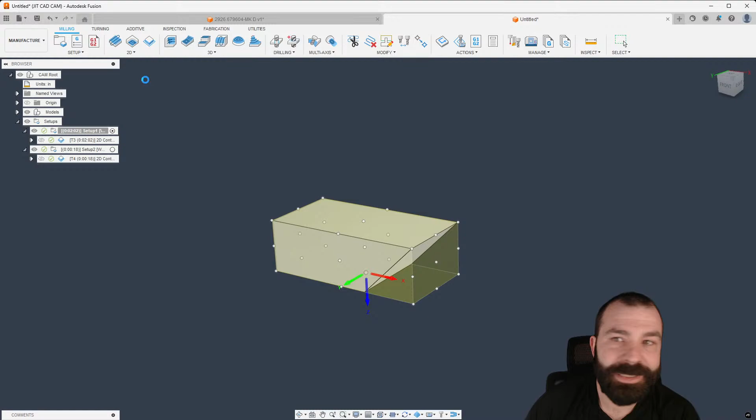Of course, now you got to save the target document. You can't just put a file in here and go, can you, right? Here we go. We are going to need more than one tool path.

So you know what? It's going to be one of them days. You guys ever feel like that? It's Friday, right?

About to find out if I can face with a dovetail cutter too. There we go. All right, so we got 2 tool paths. We got a tool change. We're gonna go ahead and save our part file as we've done, and we're gonna pull a machine, hopefully from my desktop, so that we don't have to download it. There we go. Finally.

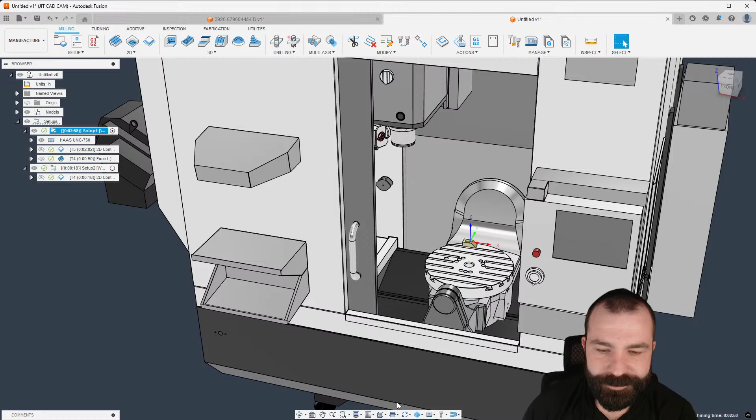Okay, so your tool change position in the world of Fusion, go ahead and not show machine, there we go, is when we simulate this, it's based on the home position in the kinematics tree, right? So as you're gonna see right now, we're sitting all the way over here to the left. We go in, we do whatever we're gonna do machining wise, we go up, we go back to that position, right? And then we come back in with our other tool.

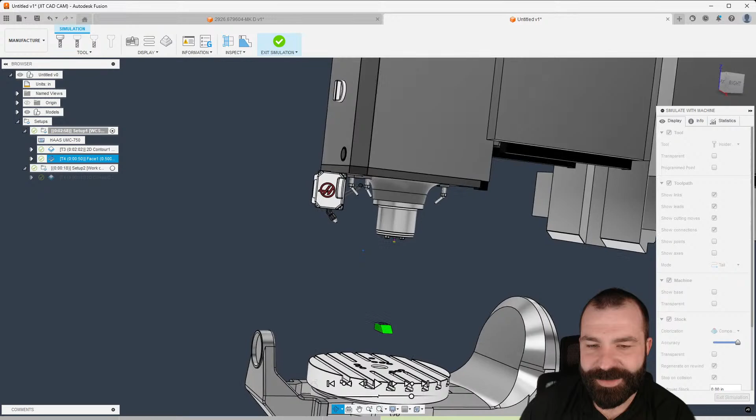In this case, I am way behind the curve on having everything set up. But you can easily edit that position on your end by editing the kinematics of your machine, right? So keep in mind, inside of your kinematics tree, you have your X, Y, and Z, and then you have your home position over here on the right. So as you can see here, we could set the home position using X, Y, and Z, and that is currently what uses your tool change position.

Now, if you want to get super fancy with it, there is a way to do this inside of the post processor. Now, I will show you where it's at, but I am not going to be editing it at the end of the day. Sorry to break anybody's heart here. But that is going to be the thing that you can figure out on your end, or you could reach out to me for a private meeting and we could talk about it.

So again, it's based on your machine simulation. There is going to be a section for tool changes. You could also type in, I believe it's tool change. Got to get far enough down in our program. But there is a specific block designated for a tool change position and where that is actually going to be. So again, you have Fusion machine simulation. Again, walking through this, where that tool change position will be simulated from, all defined inside of here.

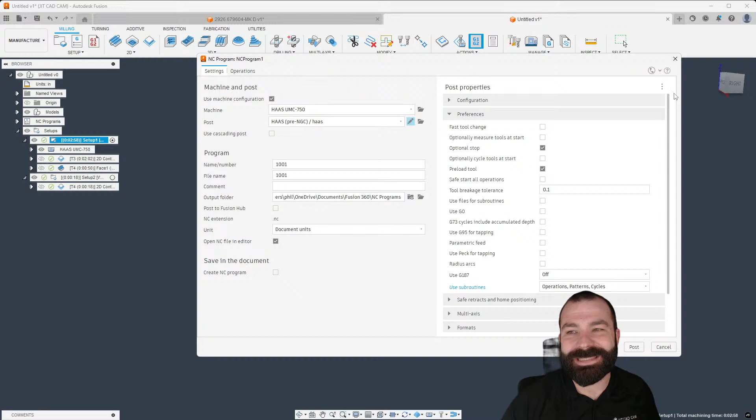That's what I'm on. But again, as you can see, Pavel, you can get inside of the post processor. What you're trying to do is, one, you could use that machine position to set your tool change position, or in the post, there's a specific section for tool change versus machine home if you wanted to move a table to a certain location.

Stuart, regarding sketch: if I create a sketch on a model with a really busy face, a lot of holes, press pull, it's a mess. Have you encountered that? Hard to explain. So keep in mind, depending on what you're trying to do when you're designing, is if I press pull this face right here, there is a point, as you can see, when those surfaces interact and overlap each other. Now, this is a pretty simple drawing, but usually what's happening is Fusion cannot calculate the intersect of those surfaces.

But Pavel, you said it's not working. Can you give me a little more information? And also my question to you would be, make sure you have the latest version of that post processor. So one thing for sure, Pavel, make sure you have the latest and greatest post. We could also scrub the list here real quick to make sure that that was added. Give me a sec here. I'll pull it up on my other window.

Now, commonly what I see is people have a post processor that is outdated. And that outdated post processor doesn't have the latest and greatest stuff. So again, if we go into Siemens, no, it was Heidenhain, right? If we look at the Heidenhain post here real quick, at one point, simulate connecting moves. That would be one that you need to find. It was removed because they've made that on by default, right? But where is it here? Connecting moves simulated is now enabled by default.

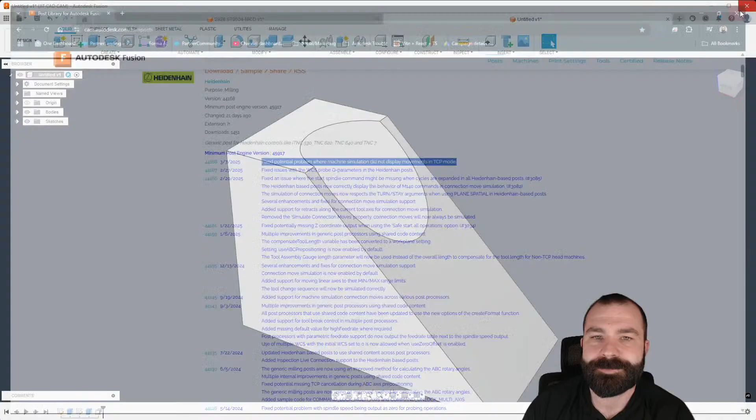Let me go ahead and get chat pulled up. I saw you guys starting to bounce around in there again. You have the latest.

So let's go ahead and jump back over and take a look here. If I was to edit this and switch it out to the Heidenhain post, I'm just curious. We'll go ahead and play around with this here.

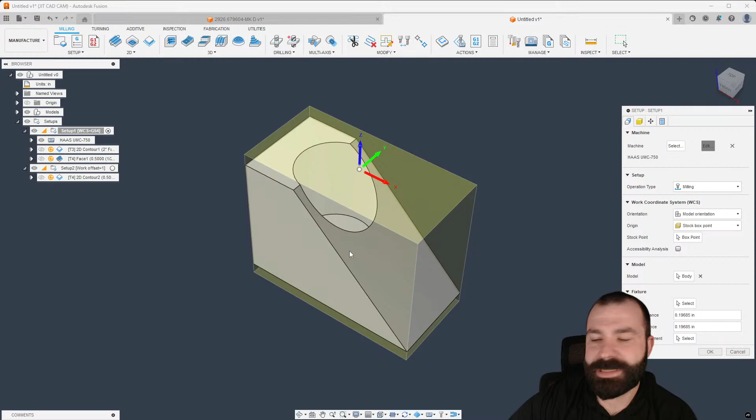Looks like I'm dropping signal again for some reason, but I'm back.

Good news for all of you out there, I'm going to be moving my office and hardwiring my computer. So we need to go ahead and swap post processors. Yes, I know this is still a Haas machine for those of you out there, but we need to demonstrate whether or not that Heidenhain post is going to do what we need it to do, right?

Let's... Guys, there? You with me? I think I disconnected again. I am hardwiring this computer this weekend.

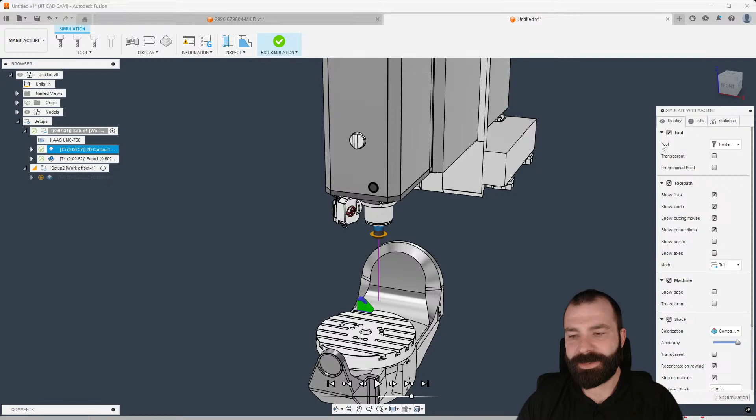So Pavel is correct. What I see here, Pavel, just so you know, it looks like when it does the tool change, it's not going to the home position for tool change, and we can fix that in the post processor as well. I'll give you guys a second. I think I disconnected there and buffered again. Pavel, let me know when you're back in chat, and I can show you where to change that in the post, or if you need to see it again.

In the meantime, I am going to fix this tool path and set it up right with a better tool. There we go, much better.

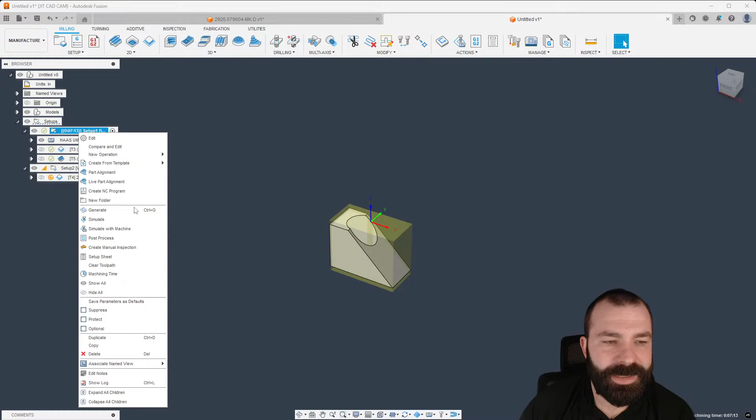As we were talking about, if you guys are joining me again, obviously I need to just throw my whole computer away. So what I've done is I've reused the same simulation, and as you can see, it comes from the home position right now. Now it's machining down my part. Then when it goes up to do a tool change, it's only retracting in Z, tool changes, and then comes back down, right? So it's not going home to do a tool change, and that's where I said we could fix that in the post. So when I go to post out, if I can click the right buttons today, we're going to go ahead and edit our post.

Now what I tell most people to do is Control F home, and if we go down a section of code, what we're looking at is the home XY line. So you have on indexing, on tool change, or on program end. Now what we need, and it says it over here, is you need to do a combination of things based on the way it's worded. It's not just a true-false statement, because we could send just Y home, just X home. What I'm going to do is highlight the X and the Y here, and we're going to go ahead and plug that in where that false is, and hit save.

If we minimize our screen and re-simulate this toolpath, it's probably going to make me show you guys that I'm a liar and it's not going to work, of course, for me. But now, when we go down after doing our toolpath, notice how we go back to our home position, do our tool change, and then come back in to machine our part. So again, based on indexing as well, you could do the same exact thing to always force it to go to wherever that home position is.